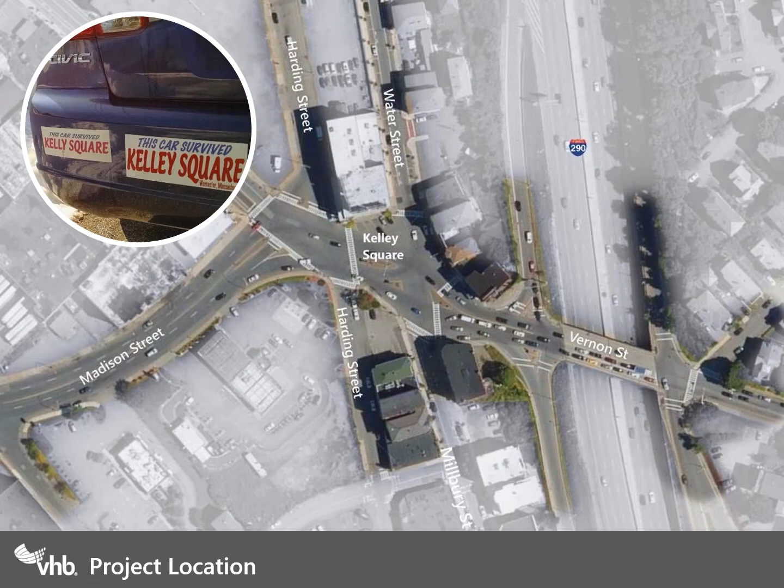else in the state. It has a notable crash history, services high traffic volumes in excess of 40,000 vehicles a day, and it provided little to no multimodal accommodation. This did start as primarily a safety project, but it turned into so much more than that.

There were certainly many things unique about Kelley Square, and the team, including MassDOT, the City of Worcester, VHB, and our partners, brought a number of innovative solutions and applications in completing this project. From the onset, MassDOT realized the need for a robust, comprehensive, and inclusive stakeholder engagement process. For decades, people have been searching for a solution to Kelley Square and had been unable to come to a consensus.

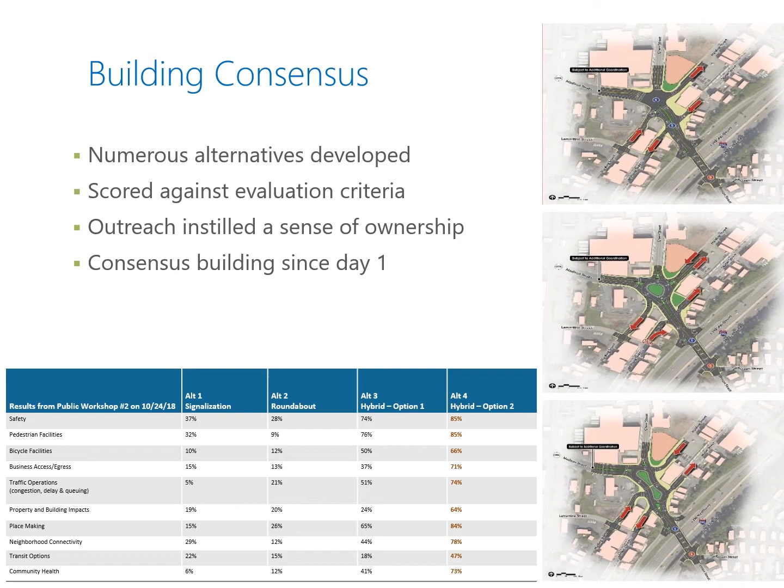That robust outreach and engagement process led to the selection of a hybrid roundabout as the preferred alternative, the first to be constructed in Massachusetts. Kelley Square itself fit well with the non-standard peanut design, and our design applied roundabout principles to the unique geometry of Kelley Square. We felt it also delivered on stakeholder requests to keep Kelley Square weird and to do as much as needed, but as little as possible.

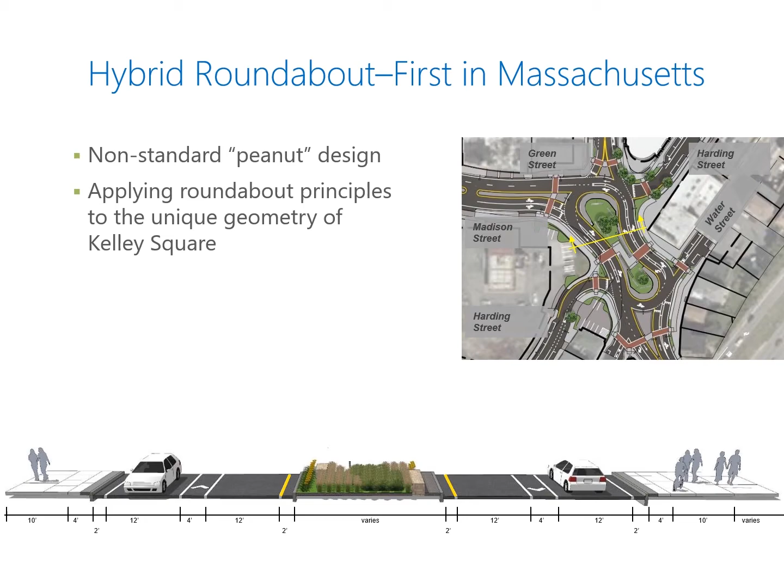We used 3D modeling to help the public envision the proposed changes. As the first hybrid location in Massachusetts, we were unable to point out other examples that people could go see to better understand what it would look like and how it would operate. The model allowed people to visualize the hybrid as well as its operations. We have heard since many times how closely the model depicted what ultimately was constructed.

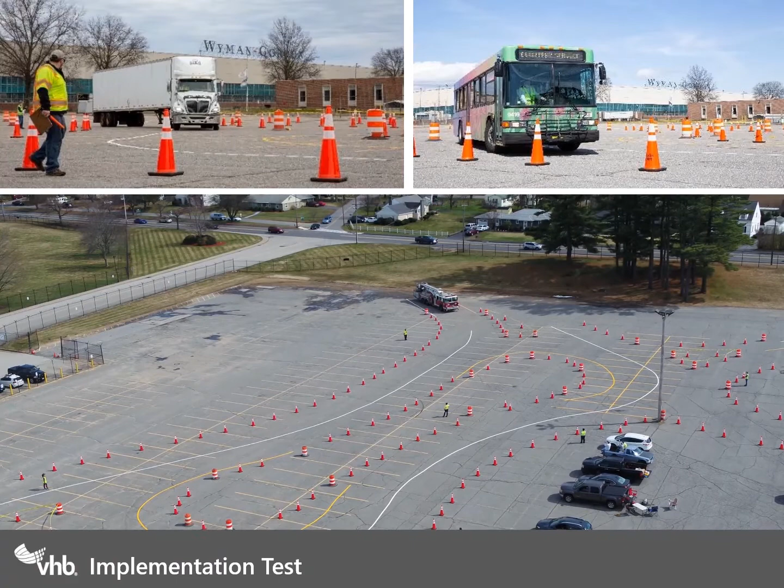Given the uniqueness of the design, we also wanted to prove to ourselves and continue to demonstrate to the public that the hybrid was the right solution. In April of 2019, we mocked up a full version of the hybrid in a local parking lot in Worcester for an implementation test. We used that setup to test the horizontal geometry of large trucks, including WB-67s, the largest fire apparatus from the City of Worcester Fire Department, and city buses to confirm that we had a design that would work for all. In fact, things went so well that day that we had extra time, and we set up various lane closure scenarios, which helped us understand some of the initial ideas related to construction staging.

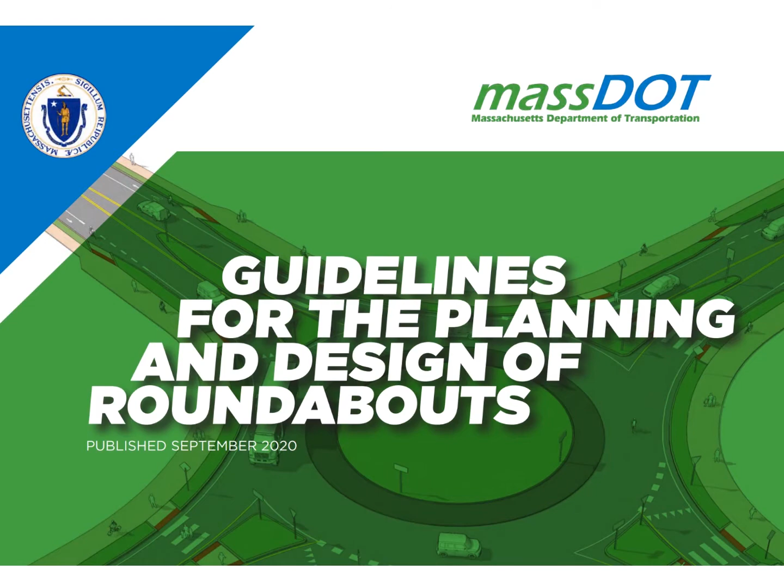Thank you, Don. My name is Tracie Lendhardt from VHB. I am the design project manager for this project. The Kelley Square project certainly has added value to the engineering profession. The Kelley Square project is featured in the new MassDOT guide for roundabout design that was issued this past September. The peanut roundabout is shown in the new guide as an example of an alternative design option. I would like to talk about a few unique features that were implemented in the design and ultimately in the construction of the peanut roundabout.

Typically, roundabouts discourage pedestrian movements to and from the center island. But with Kelley Square, there's a large pedestrian desire line between the north side and the south side of the intersection. It was unrealistic to expect pedestrians to walk all around the peanut, so preventing access through the center of the roundabout meant cutting off access to destinations. So we, the designers, needed to rethink the idea of allowing pedestrian access through the center of the roundabout, but we wanted to make the crossings as safe as possible. This was done by implementing high visibility decorative crosswalks and the use of RRFBs. We also proposed the use of Danish-style offset crosswalks.

Another feature is the use of vane striping throughout the roundabout. Typically, vane pavement markings are used at the approaches to multi-lane roundabouts to better define vehicle alignment into the roundabout. For Kelley Square, vane striping was provided within the circulating roadway to keep vehicles within their designated lanes. It also gives the impression that the effective width of the roadway is narrower than it actually is.

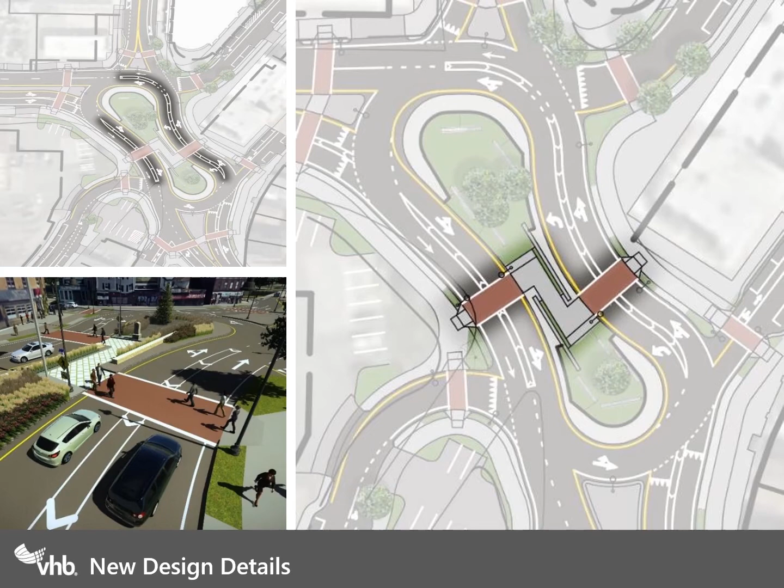Kelley Square was under a very tight schedule for design and construction, but the project didn't sacrifice public engagement or quality in order to meet this expedited timeline. The future value for Kelley Square is realizing that a well-thought-out project like this can be done quickly with public participation. The Kelley Square project certainly had more complexities than just the schedule and the public engagement pieces. I will touch on just a few of them.

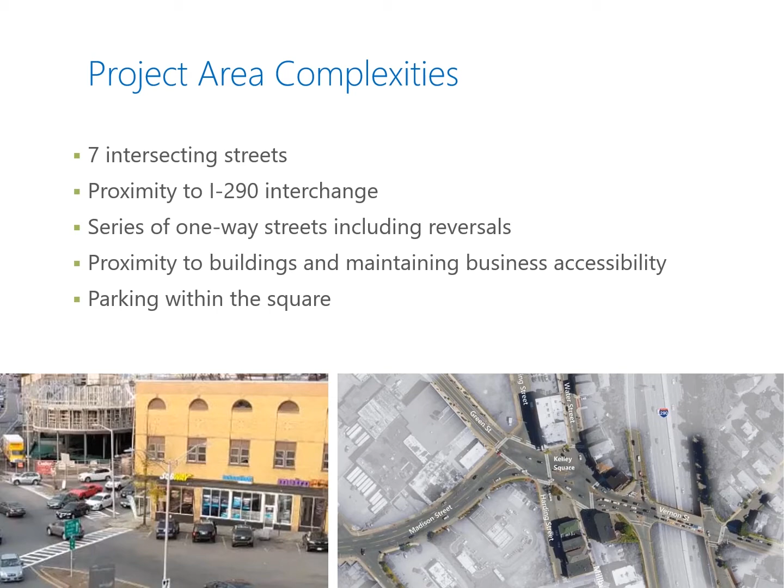Not only did we need to think about the impacts to traffic, but there are several other elements that brought complexity to the project. The historic Blackstone Canal runs directly underneath the central island of the peanut. There's a cobble roadway just below the asphalt surface. All of the city's utilities are underground. There are no overhead utilities, so there's a maze of underground infrastructure, which just added more complexity.

The physical construction of the roundabout itself was complicated. How to build in this dense urban area all while maintaining traffic and access to the businesses had to be thought out, as did the close proximity of the buildings to the roadway. Not only was the design on an expedited schedule, but the construction was also. J.H. Lynch had 13 months to complete the construction of this project. For a project this size, construction would have taken 2 to 3 years.

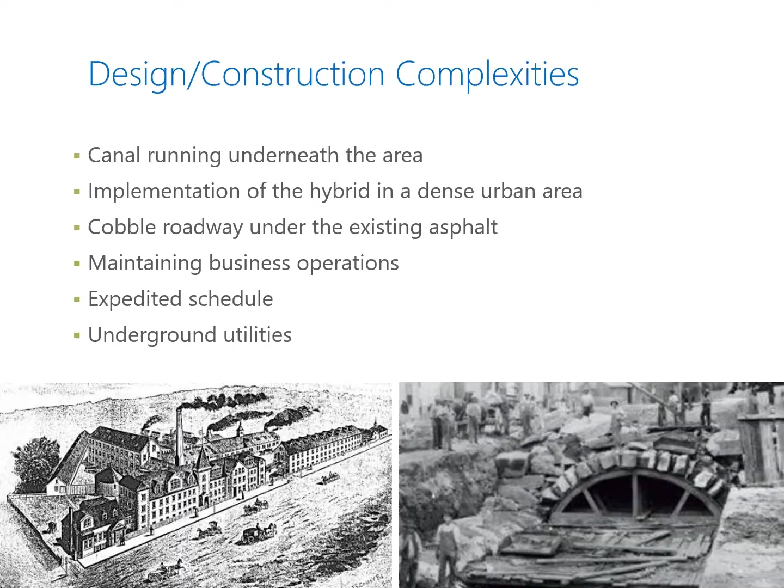day one. Alan Fletcher is a local resident and developer in the area. He is the owner of the Worcester Public Market that you will see later in the presentation. The local stakeholders stayed engaged throughout the entire process, from planning to design and throughout construction. And now I'll turn it back to Don.

At VHB, we're also proud that the project incorporated many social, economic, and sustainable development considerations. In addition to addressing the safety and operational concerns for vehicles, the project had a primary focus as well on increasing the level of multimodal accommodation. First, with regards to pedestrians.

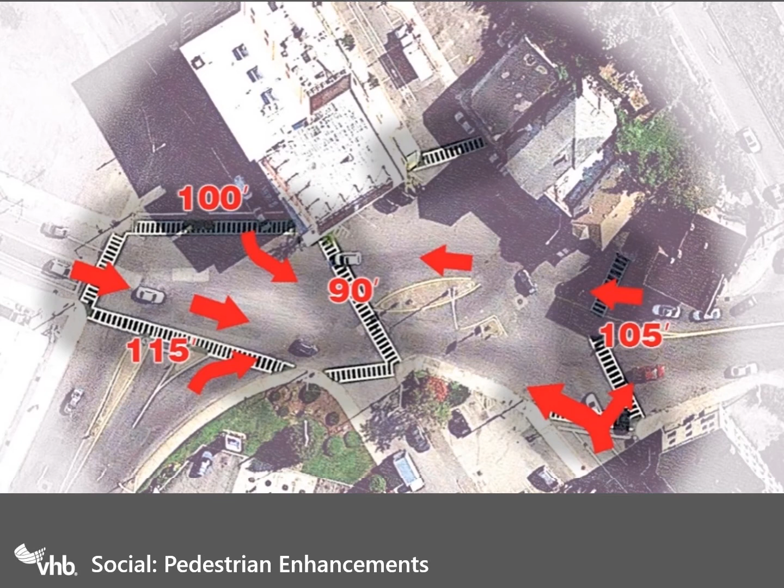The square previously consisted of extremely long crosswalks, many in excess of 100 feet. To further complicate matters, those long crosswalks provided little to no refuge areas for pedestrians. And given the lack of traffic delineation, pedestrians had to be aware of potential traffic approaching from multiple directions. The hybrid design addressed all of those issues.

First off, shorter crosswalks. No single pedestrian crossing move was more than 2 lanes or about 32 feet in length. And where an overall crossing was in excess of that, substantial refuge areas were being provided. Equally important, pedestrians now only had to be concerned about traffic approaching from a single direction.

In addition to these features, we also incorporated high visibility crosswalks, RRFBs at all 2-lane crossings, and a raised crosswalk at Madison Street to provide a level of traffic calming for vehicles entering the square.

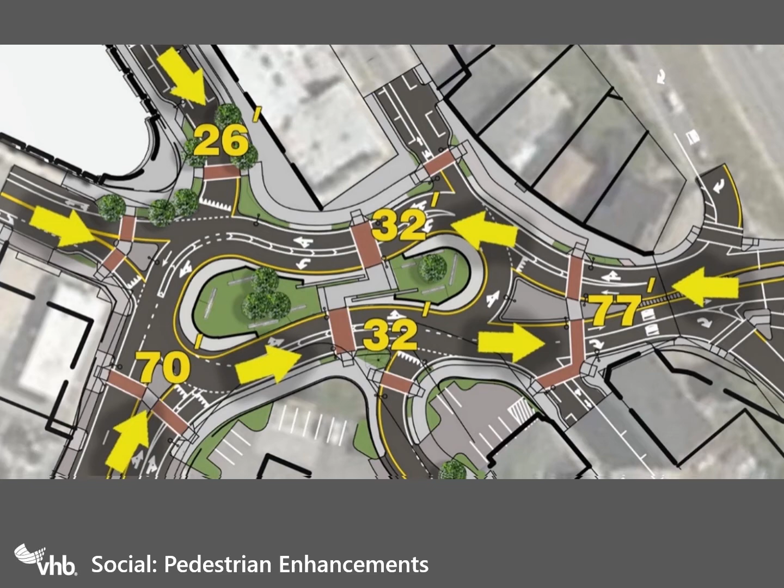In addition to pedestrian enhancements, the project also paid particular attention to enhancing the environment for cyclists. We committed from the beginning to providing the highest level of accommodation within the constraints of the project area. We ended up with a combination of treatments. The majority of the project area, shown in red, provided a shared use path, a 10-foot wide area for pedestrians and bicyclists, delineated both in signage and also medallions on the shared use path surface.

We provided a separated bike facility in blue along Harding Street where bicyclists were forced to ride contraflow to the one-way Harding Street operation. This represents the first separated bike facility in Worcester. We also used on-road bike lanes on many approaches to transition to the current bicycle accommodation as shown in yellow.

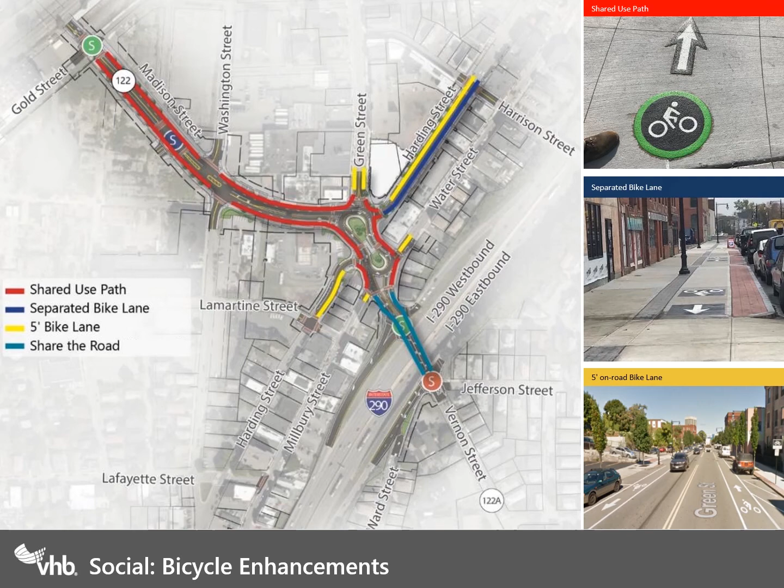The bicycle enhancements within Kelley Square also allowed us to build out the local and regional networks. In conjunction with other city projects, the Kelley Square project provided connectivity to both the East Coast Greenway and Blackstone River Greenway regional networks. It also provided a key link in the local bicycle network. Tracie?

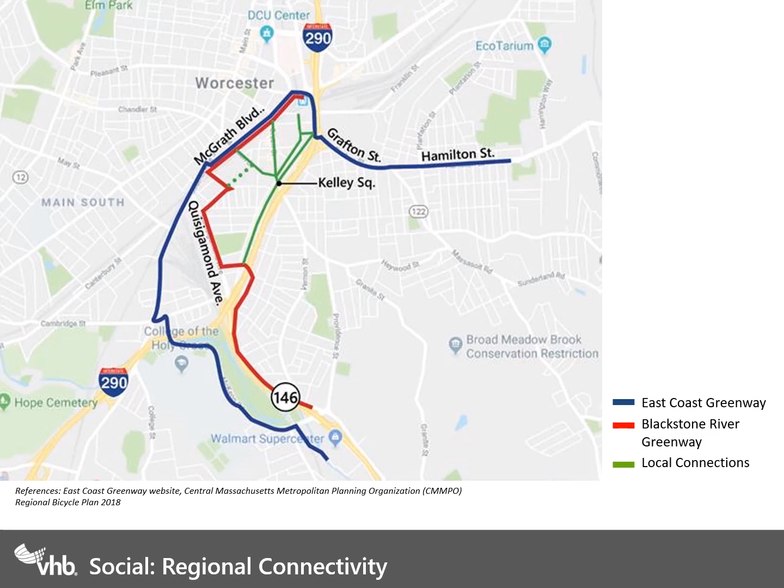Thank you, Don. Worcester's economy is growing. Kelley Square is just down the street from the new Polar Park, the home of the Woo Sox. This entire area is undergoing a redevelopment with new shops, restaurants, cafes, and the new marketplace.

Several sustainable elements were incorporated into the design and the construction of Kelley Square. The use of landscaping was important. The placement of street trees for shading and the use of light-colored concrete will all reduce the heat island effect. The vegetation species are all native, drought and salt tolerant, and are low maintenance. For the overall project, there was a reduction of impervious area.

LED lighting was used for the street lights. Bike racks will be installed as part of this project to promote bicycle usage. Graded sidewalk treatments were used to indicate where the Blackstone Canal runs underneath the roundabout. And the freestanding granite wall in the center of the island is made of recycled granite block. Some of the stones are from the Blackstone Canal, and the rest are from old bridge abutments found at a granite salvage yard.

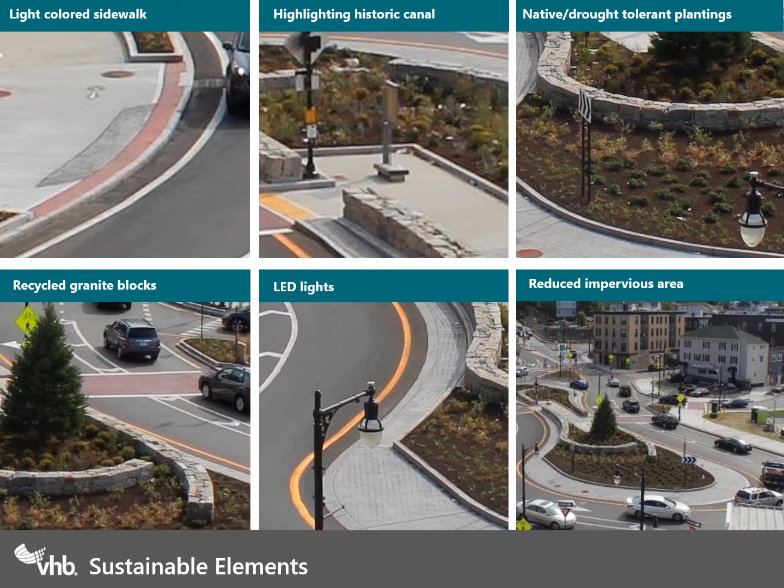the peanut. Once the top course of the pavement was installed and the pavement markings were in place, the roundabout began to operate as a 2-lane roundabout. People adapted very quickly to 2 lanes, although there were a few people that refused to give up the on-street parking.

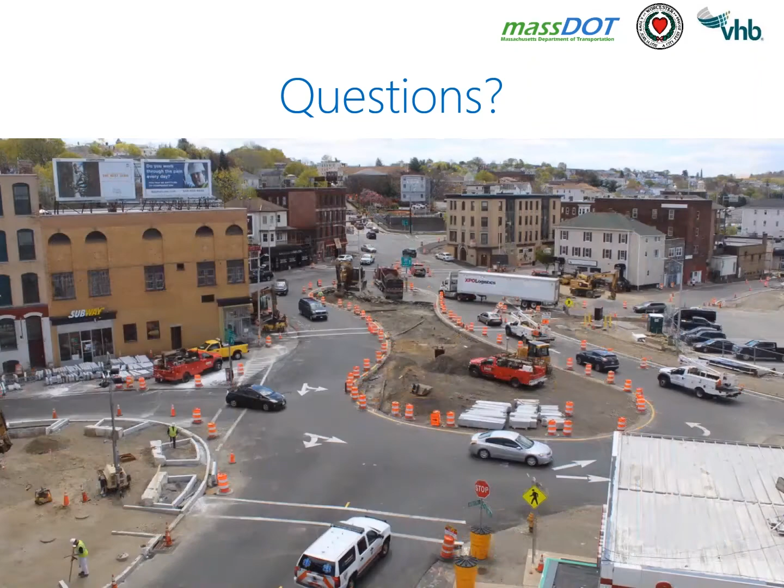This concludes our presentation. We would be happy to answer any questions.